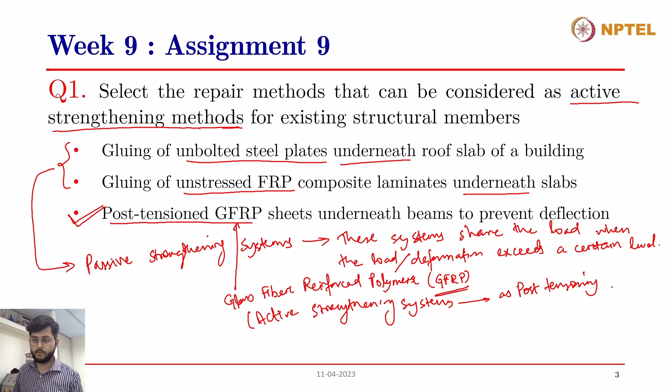So these are active systems, active strengthening methods, as post tensioning is done. So the answer to this question is post tension GFRP sheets, underneath beams to prevent deflection.

Moving on to the second question: a commercial building in use has to be upgraded to improve its seismic resistance. Choose the most appropriate terminology for this type of intervention. The different terminologies given are: repair, restoration, maintenance, rehabilitation, retrofitting, or stabilization. Which of these terms would you assign to this kind of situation? A commercial building which is already in use has to be upgraded. The keyword here is upgraded, to improve its seismic resistance.

Can somebody answer this question? Retrofitting. Okay, thank you, Samiksha. Why would you choose that, and how is it different from the other terms? Retrofitting means when you upgrade the existing structure to improve its properties, as explained in the lecture with a bar graph type chart, when you upgrade the existing structure. Thank you, Samiksha, for answering this question. Yes, this is the right answer actually.

I'll go over all these terms one by one, and we'll discuss what they essentially mean and how they apply to different cases of repair and restoration, of repair and maintenance of concrete structures as a broader topic.

So first of all, repair, as already discussed in the lecture as well: repair is something that is done when there is damage or deterioration. Again, these two are different mechanisms, damage and deterioration. Damage could be due to accident, like fire or impact load or blast, etc. And deterioration could be due to corrosion or deterioration of concrete, concrete deterioration.

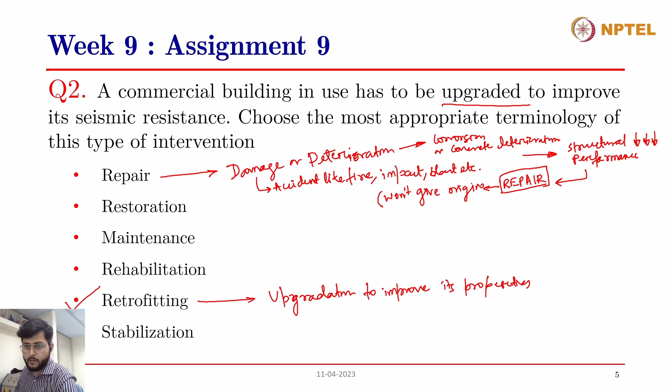But repair work won't give you the original performance. So I'd like to add one more element: won't give original performance. Repair work is just enhancing the structural performance to its normal level.

As we have also seen in the lecture, with the passage of time, let's say this is the original performance. With the passage of time, the normal structure tends to deteriorate, and this could be due to normal deterioration processes and aging as well. So this is the actual performance.

But due to a certain kind of accident, the structural performance could be suddenly reduced. This is a sudden reduction, and the enhancement of this reduction to the actual performance level is known as repair.

Then comes restoration, and restoration is, as the name suggests, restored to original performance levels. This is typically, you might have also heard this term, restoration work, in the case of monuments or very old structures - restoration of monuments.

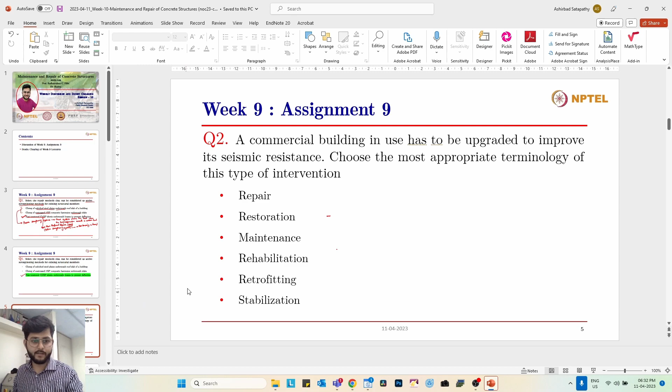Then comes normal maintenance. Maintenance is, you have to maintain the structure. Oops, sorry, I just lost it. Oh my God, I lost everything. Anyway, I'll just highlight it instead of going in detail. Sorry about it, I lost all the annotations.

So repair could be due to damage or deterioration. Damages are accidents like impact, fire, etc. Deterioration could be corrosion, concrete deterioration, and this leads to a sudden reduction in structural performance.

And then comes repair, which is enhancement but not to original performance levels. Not to original performance levels - this is known as repair.

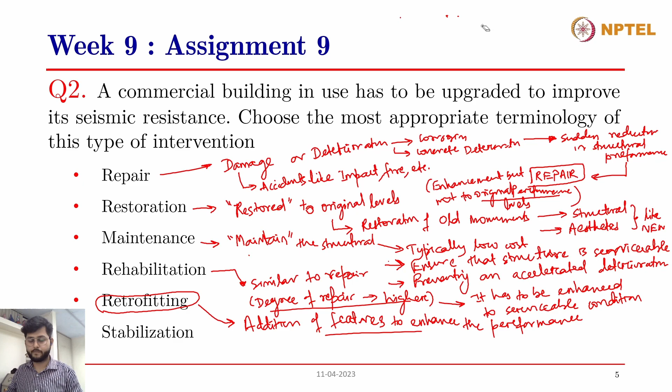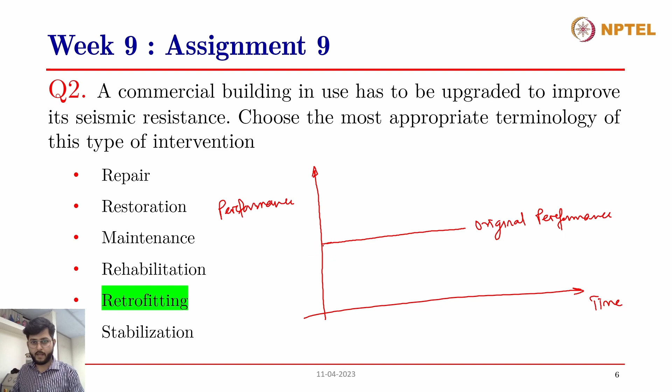So let's say this was the graph. This is time and this is performance. And this used to be the original performance till a certain period of time. This was the original level of performance, and this was the naturally deteriorating performance. So with the passage of time, the performance level was actually getting lowered due to natural processes.

Now what we did was we enhanced the performance limit, and this is the enhanced performance limit. And then we carried out retrofitting. So initially we carried out retrofitting so that the performance reached the requirement level, and then it started to degrade on its own. This is the retrofitted performance. So this is what is known as retrofitting.

This could be due to, as we have discussed in the lecture, retrofitting could be done when this is a very old structure and still serviceable, working perfectly fine, but we have to conform with some new requirements that have been included in the structural design. Let's say the structure is not adequate to take the earthquake loads now. So as per the new guidelines, we have to redesign or add some external features to the structure so that it will conform with the requirements of the earthquake design.

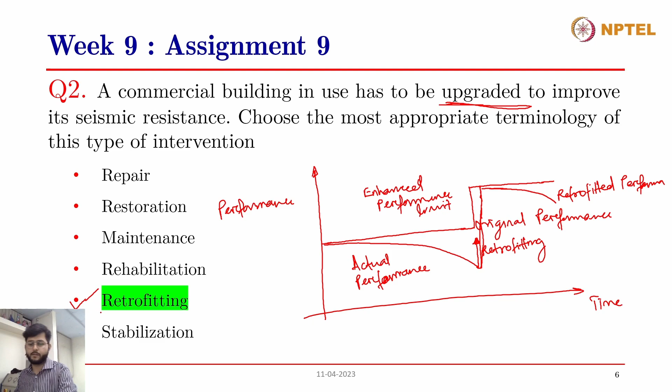Moving on to the third question: choose the least appropriate statement regarding the selection of strengthening and stabilization methods. Only short-term compatibility between the old and the new material has to be ensured. The accessibility and feasibility of the repair work has to be considered before selecting a repair strategy. The repair method has to be selected based on the residual life cycle cost. Which of these is the least appropriate statement? Can somebody answer this question?

We have to select the least appropriate statement regarding strengthening and stabilization methods. Yes, somebody wants to answer?

All right, actually the answer to this question is the first option: only short-term compatibility between old and new material has to be ensured. This is the wrong statement actually, so this is the least appropriate, because...

Whenever we are carrying out any repair or strengthening work of any structure, we want that this repair work has to last for as long a period of time as possible, so that we do not have to repeat this repair work within a very short span. Because whenever we're carrying out any repair, maintenance, strengthening or stabilization method, these methods entail a lot of costs—not only the cost at the time of installation, but also during the life cycle, during the lifespan in which the repair will be effective.

So whenever we are carrying out any repair work, we have to ensure the maintenance of that repair work. Let's say we have carried out some patchwork, or some concrete jacketing, or provided steel plates underneath the surfaces of the flexural members. These repair systems will also deteriorate with time, and therefore will require further maintenance work, which will again add to the total life cycle cost of the repair work.

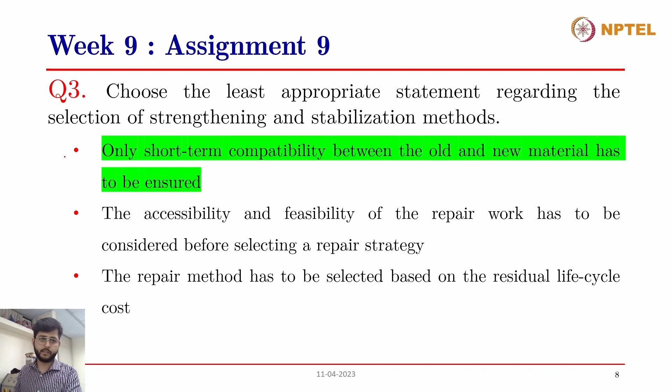Moving on to the fourth question: it is essential to seal all the existing cracks using epoxy before strengthening a structure by external post-tensioning. The sealing or filling of cracks may help even distribution of pre-stressing forces. Is it a true or false statement? Can somebody answer this question?

I'm the only one left out. Yes, Madam, you Doctor already left. Okay, so this is true. We have to fill up the cracks and then do post tensioning, otherwise there will not be even distribution of pre-stressing forces. Right. Thank you, Dr. Satish.

So when all the existing cracks are filled with epoxy before strengthening, filling the cracks with epoxy ensures even and uniform distribution of stresses between the new and the old material.

Because after strengthening, we will not be able to fill it with epoxy, and once the strengthening has been done, if the cracks are not filled properly, there will be uneven distribution of the stresses, which will further lead to stress concentration and further cracking or failure of the structural member. Therefore, we want all the cracks and voids to be filled.

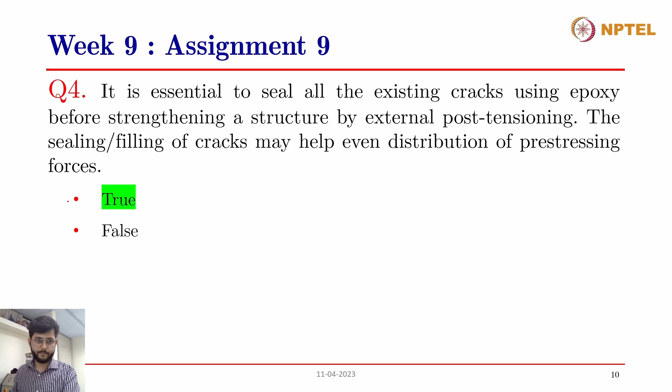Moving on to the fifth question: on the girders of a highway bridge, diagonal cracks were observed near the piers or supports, as shown in the figures. As you can see, there are diagonal cracks near the piers. So, among the given choices, choose the most appropriate repair strategy to strengthen the girders.

These are some of the strategies listed: external post tensioning using CFRP straps in the longitudinal direction, wrapping the girder end regions with CFRP laminates or straps in the transverse direction, base isolation of existing columns, and bonding steel plates to the underside of the girders. Which of these would you choose as the appropriate repair strategy for these diagonal shear cracks at the pier locations? Yes, Dr. Satish, you'd like to answer?

The answer to this question is wrapping the girder end regions with CFRP laminates and straps in the transverse direction. First of all, the first statement, external post tensioning using CFRP straps in the longitudinal direction, will take care of the flexural load carrying capacity.

And since there are diagonal cracks, these are a sign of shear cracks, so this is not the answer, since that option will take care of the flexural load carrying capacity instead.

Then wrapping of girder end regions with CFRP laminates in the transverse direction. Again, yes, the transverse direction is required because, as we know, to take care of shear, stirrups are also given in the transverse direction. So this will give us a stirrup action, and...

...wrapping it at the girder end regions, because at end regions shear is high. So this is an effective strategy to take care of the diagonal shear cracks occurring at the piers or support regions. At the support regions the shear is highest, and therefore it requires further strengthening. If we provide the CFRP laminates or straps in the transverse direction, they will give us a stirrup action, and this can be considered a good repair strategy in this kind of situation.

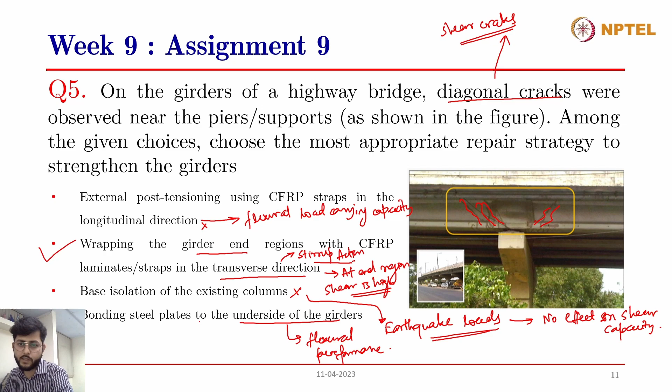Bonding the steel plates will give you an additional section of steel which will be able to take the tensile loads. This will enhance the flexural performance of the girders, not the shear performance. So the answer to this question is wrapping the girder end regions with CFRP laminates in the transverse direction.

Moving on to the sixth question: punching shear resistance of a column slab joint can be enhanced by which of these options? Confining the column using FRP laminates, increasing the effective cross-sectional area of the critical shear plane vertical of the slab, providing collars and column capitals, providing drop panels. Which of these options is correct in case of punching shear resistance of a column slab joint?

Yes, can somebody attempt? Dr. Satish, you want to try?

All right, the answer to this question is increasing the effective cross-sectional area, providing collars and column capitals, and providing drop panels.

So what is punching shear resistance? I'll try to explain. Whenever there is a column, this is a column, and I'm showing a cross section, and then there is a slab. So let's say this is a column, and then there is a slab element directly resting on it. So this is a flat slab directly resting on the column.

Then what essentially occurs is, since the column dimensions are very small compared to the slab, and the slab thickness is also small, cracks are formed at the column support locations. There are diagonal shear cracks, and these sides tend to come downwards, while this side remains intact. So there is a punching shear, or the column location only punches through the slab, and therefore there are cracks occurring at these locations. This is known as punching failure.

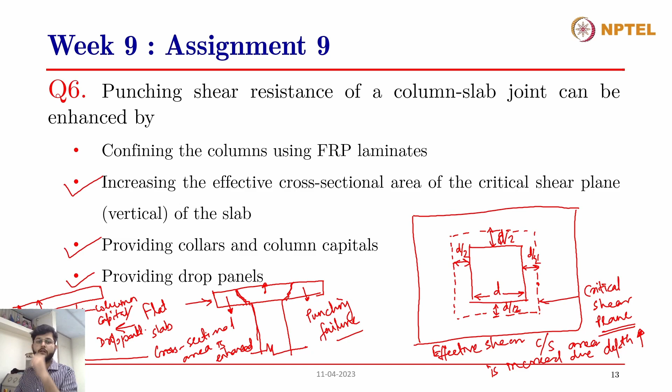So these are the different strategies that could be adopted to increase the punching shear resistance or reduce the risk of punching shear failure in column flat slab joints.

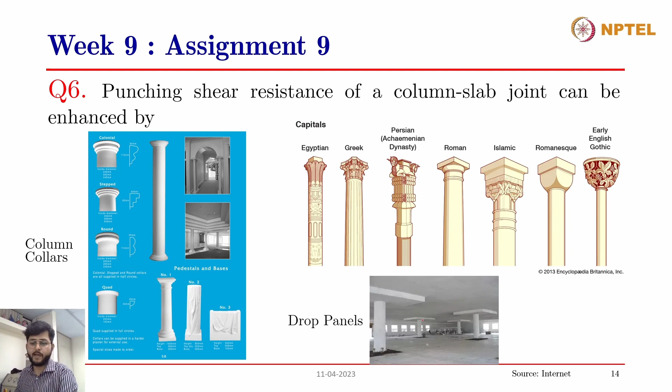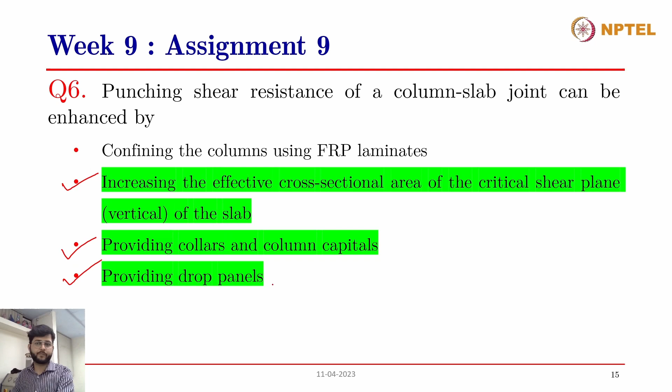So the answer to this question is increasing the effective cross-sectional area of the critical shear plane. Then, providing collars and column capitals and providing drop panels also increase the effective cross-sectional area by increasing the depth, and this reduces the punching shear stress itself. So these are the two effects of adding collars and column capitals.

Moving on to the seventh question. Introducing shear walls between columns and beams can help in enhancing the following: moment resisting capacity of the beam column frame system, resistance to the settlement of the footing, lateral stability of columns, earthquake resistance of the building system.

Which of these options are correct with respect to shear walls between columns and beams in structural systems? Yes, Dr. Satish, go ahead. The first one is okay, moment resisting capacity is enhanced. It has nothing to do with settlement. Lateral stability of the column is enhanced. Earthquake resistance of the building system improves.

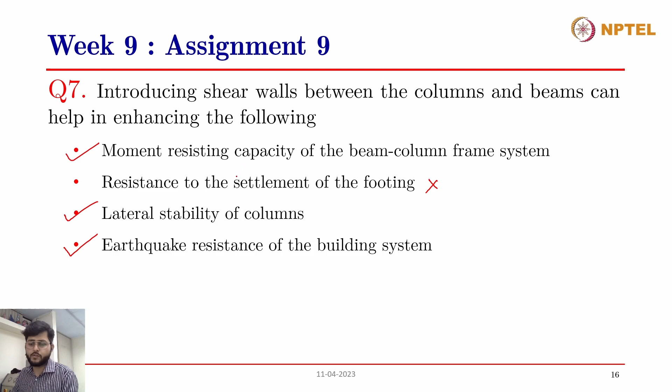I will take the help of this picture to explain the action of shear walls in a structural system. Shear walls are basically reinforced concrete walls between columns and beams, and what they essentially do is share the lateral loads coming onto the structure with the columns. So whenever there are two columns in a frame structure and there is a lateral load coming, the load is taken by the columns, and the structure tends to sway like this.

So this is the delta. But when we have a shear wall system, these RC walls share the lateral loads with the columns and beams.

So they have two actions basically. One is the shear deformation - this is the shear. This is the total delta coming onto the structure: delta 1, delta 2, and delta 3. This is the total sway occurring in the structure, and therefore the shear wall, not only the columns in this case, but also the shear wall take part in resisting the lateral load or shear deformation.

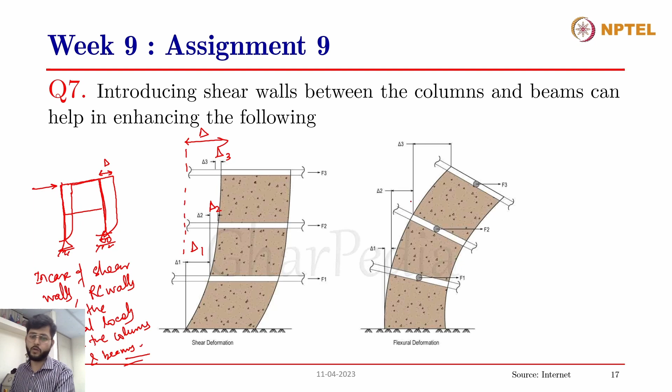Then there is the flexural deformation. Due to the lateral loads, not only does the concrete structure sway, but due to its stiffness it tends to bend or buckle as a whole, and therefore the shear walls can increase the moment carrying capacity of the system or enhance the flexural performance of the total structural system. Therefore, yes, they enhance the moment resisting capacity of the beam column frame system, enhance the lateral stability of the columns, and enhance the total earthquake resistance of the building system.

So these three are the answers, but they have nothing to do with settlement of the footing, because whenever there is differential settlement between two footings, even with a shear wall structure - let's say this is a column and another column, with a footing each, connected with a shear wall system - if this footing goes down, cracks will be formed, diagonal cracks due to the differential settlement. So differential settlement will cause cracks in shear wall systems as well, and therefore it doesn't provide any resistance against the settlement of the footing.

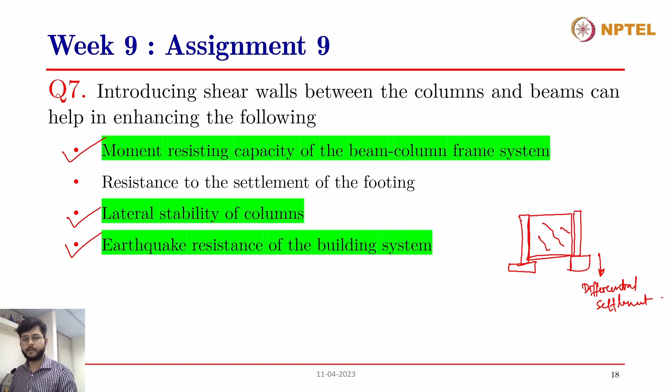Yes, this is true because it adds to the dead loads, so the foundation is to be looked after. Since it is concrete jacketing, and we know concrete elements are heavy in nature, they also add to the dead load of the structure, and therefore we need to ensure that the foundation is designed to carry the extra dead loads. So this is a true statement.

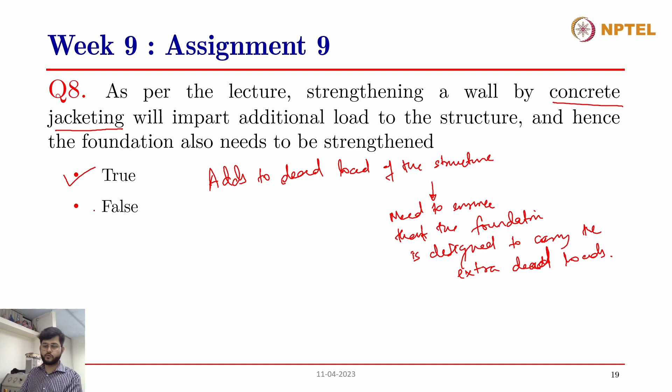Whenever we are doing concrete jacketing, it will impart an additional load to the structure, and therefore the foundation needs to be checked - if it is properly designed from the beginning with sufficient room for additional load, then it need not be strengthened anymore. But if the foundation does not have sufficient load carrying capacity for the additional load imparted, then we have to further strengthen the foundation as well, so there is no failure at the foundation.